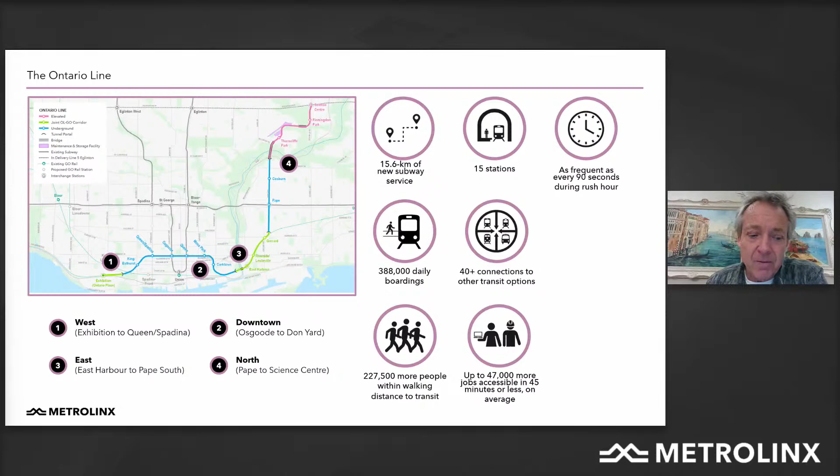So this is Gerrard Station. Gerrard is at the corner of Carlaw and Gerrard Streets. We're expecting during the peak morning hour to have 3,300 people passing through this station. And we have entrances on the northeast corner and the southwest corner of Gerrard and Carlaw.

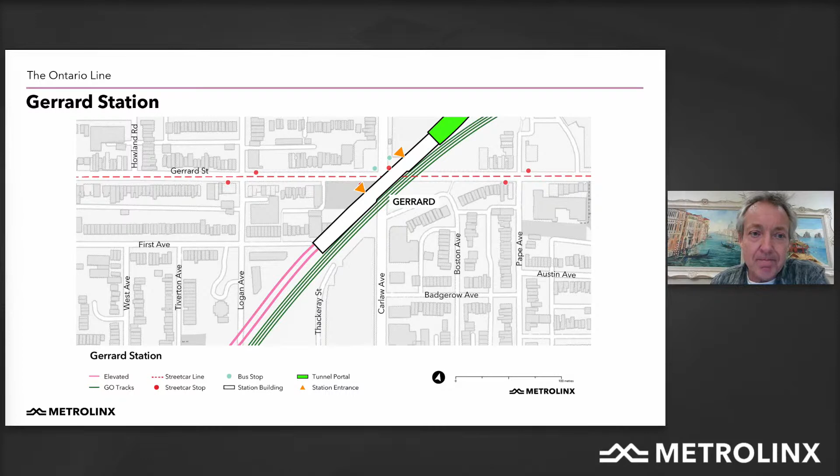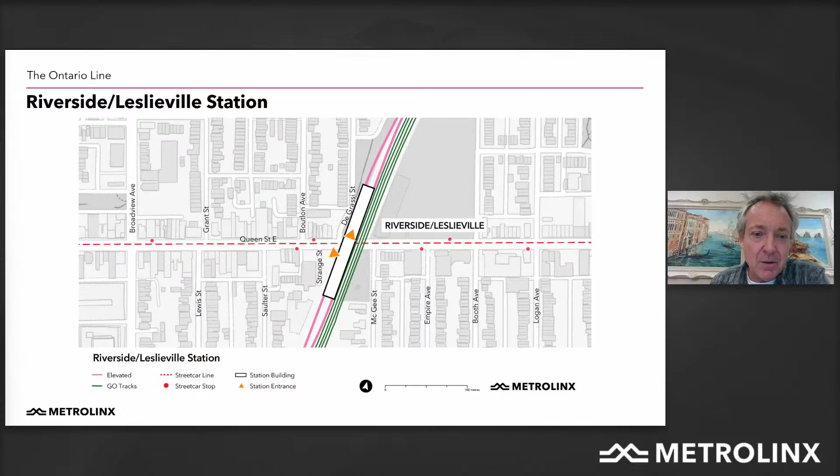Passing through the joint corridor area where we're running in the area with GO Transit, we come to Riverside Leslieville Station. Here, we're expecting to serve over 4,000 people during the peak morning hour, and we have entrances on both the north and south sides of Queen Street.

As we head south and over the Eastern Avenue Bridge, we come into East Harbour Station. East Harbour Station is where we have an interchange with GO Transit. Here in the AM peak period, we're expecting over 14,000 people per hour. As we go across the Don River, we come into the Don Yard area where we have a structure called a portal, and the portal is the entranceway to the underground section of the subway.

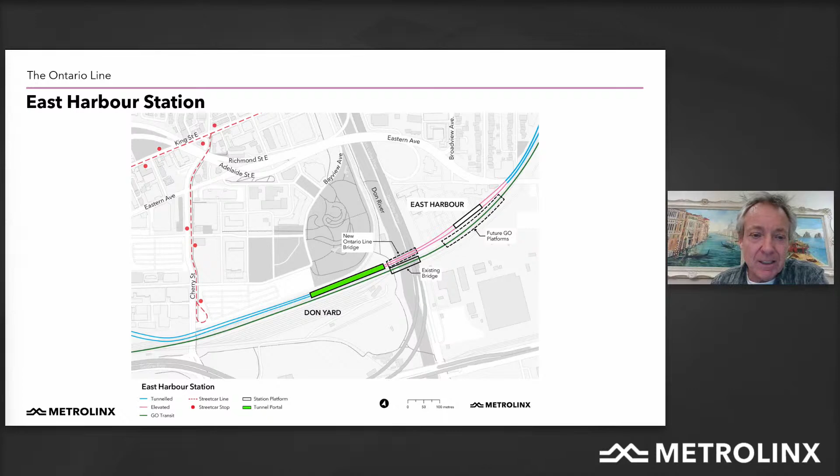As we continue heading west, and in this case north, we come to Corktown Station. It's at the corner of King and Berkeley Streets, with its entrance on the southeast corner. This station, we're expecting over 4,000 people per the AM peak period hour.

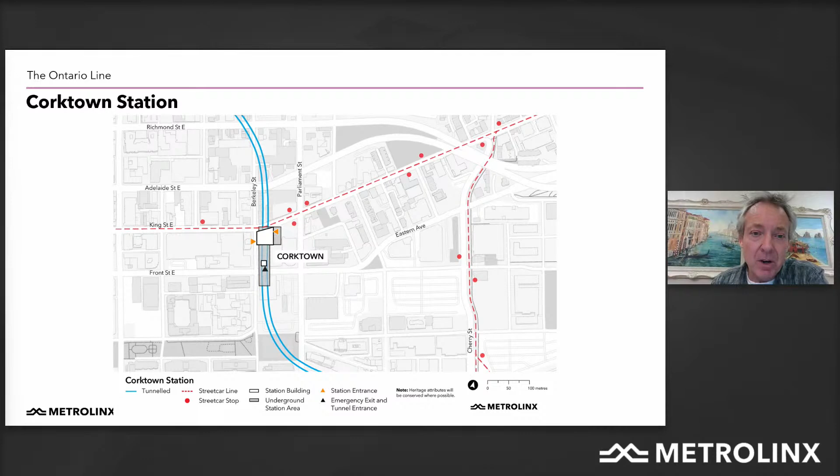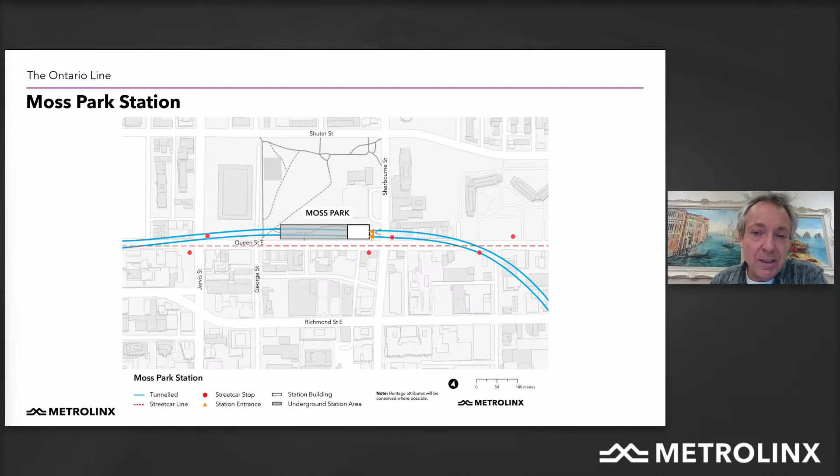Heading back up to Queen Street, we're at Moss Park Station at the corner of Queen and Sherbourne with over 7,300 passengers boarding and alighting during the AM peak period. The station entrance is on the northwest corner of Sherbourne and Queen.

Continuing west along Queen, we come to Queen and Yonge with the interchange station with Line 1. This is the busiest station for the Ontario Line with over 16,000 boardings during the AM peak period.

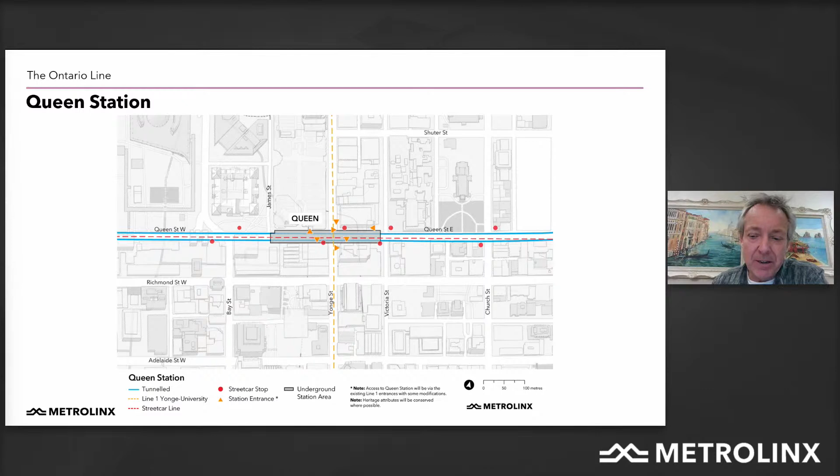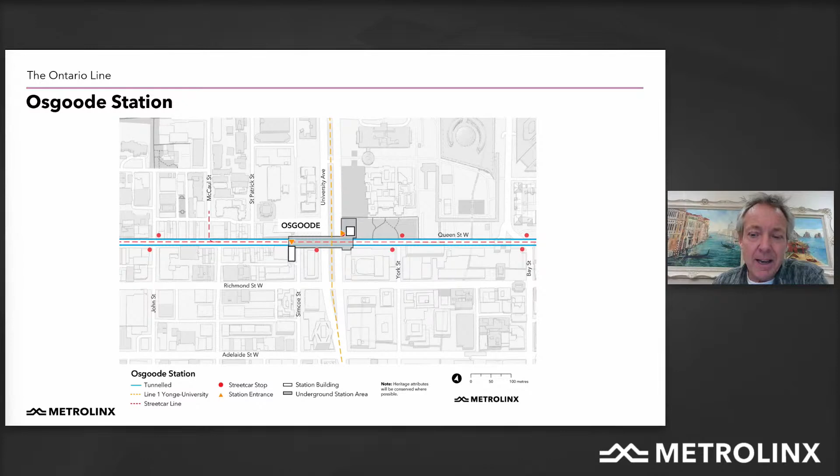As we continue west underneath Queen Street, we come to another interchange station with the existing Line 1 subway, Osgoode Station. Osgoode will have over 12,000 people passing through the station during the AM peak period.

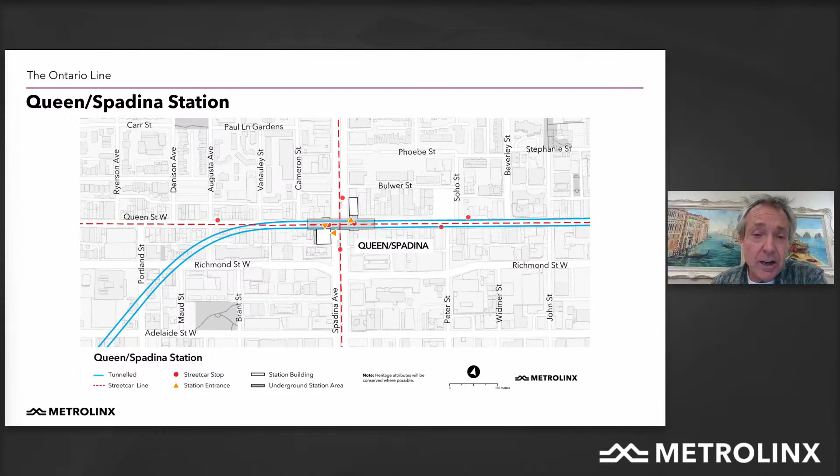Once again, heading west, we get to the corner of Queen and Spadina. At Queen and Spadina, we have over 7,000 riders coming through during the morning peak hour, and we have entrances on the southwest corner and northeast corner.

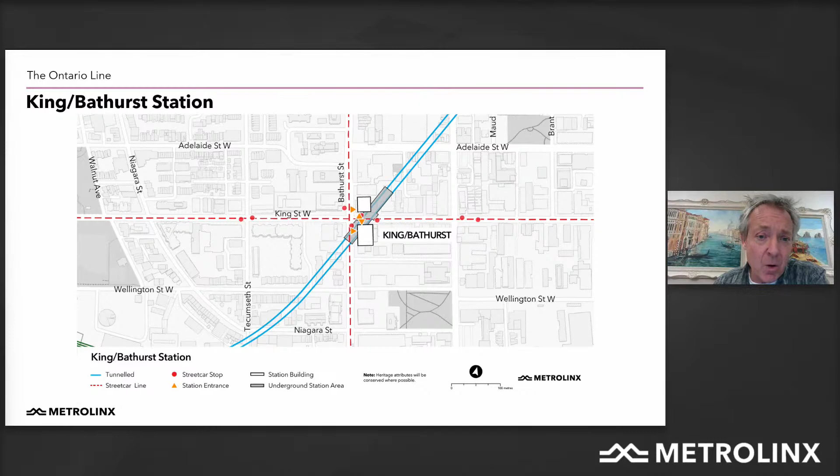As we head further west, we come to the King Bathurst Station, which is on the corners of King and Bathurst. Here we have entrances on the northeast corner of King and Bathurst and the southeast corner of King and Bathurst. We have over 5,000 people passing through this station during its AM peak hour.

We come to our terminal station at Exhibition. Here we have an interchange with GO Transit with over 12,000 people during the AM peak hour passing through this station. It also gives great access to Liberty Village.

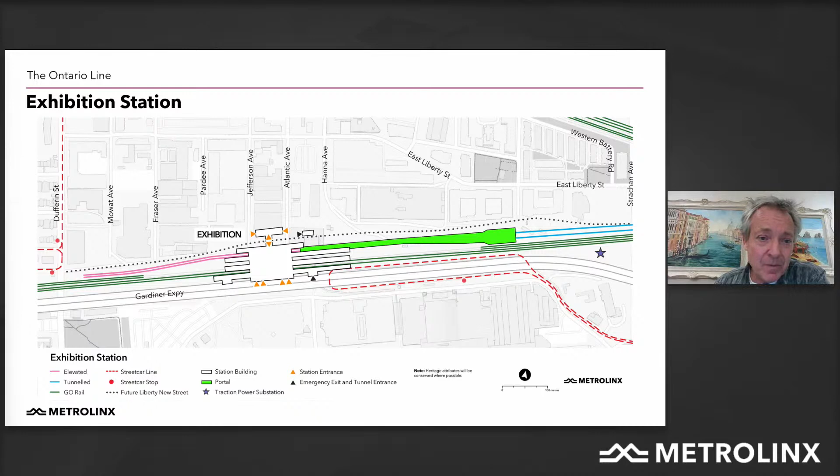So what are we expecting over the course of the next few years? Well, by mid-year 2022, we will have started construction for the Exhibition early works, the Corktown early works, and the Lower Don Bridge and Don Yard early works. In late 2022, we're going to start the downtown advanced works, the Joint Corridor early works, and the East Harbour early works. By 2023, the two big projects which are currently in market, the South Civil Stations and Tunnels contract will begin, as well as the Rolling Stock Systems Operation and Maintenance contract will begin. By late 2024, we will have tendered and awarded the North Civil Stations and Tunnels contract, and construction will begin there.

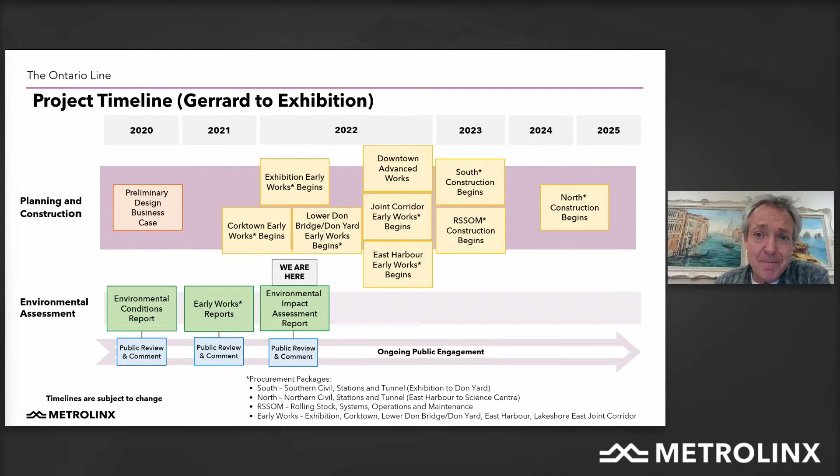Our environmental assessment work for the Ontario Line has been well underway for the past few years. For this work, we're following a project-specific environmental assessment regulation, which is similar to the transit project assessment process or the typical environmental assessment process for transit projects, in that it requires study of the existing environment, consultation with interested parties, and identification of mitigation to avoid or reduce impacts of the project on the existing environment.

One way that the Ontario Line environmental assessment process differs from the typical environmental assessment process for transit projects is that it's phased. So we completed the first phase of the environmental assessment looking at existing conditions back in 2020 when we published the environmental conditions report. This report collected baseline information about all the typical environmental disciplines that we look at in a transit environmental assessment,

like archaeology, cultural heritage, noise and vibration, the natural environment, socioeconomics, air quality, traffic, and soil and groundwater. The second phase of the Ontario Line environmental assessment process is early works reporting. And those early works reports build on the environmental conditions report with completion of standalone impact assessments for portions of the project that are proceeding to implementation ahead of main works. So we completed 5 early works reports through the end of last year for works at Exhibition Station, Corktown Station, the Lower Don Bridge and Don Yard, at East Harbour Station, and for the Lakeshore East Joint Corridor. And each of these reports has now been approved by the Minister of Environment, Conservation, and Parks.

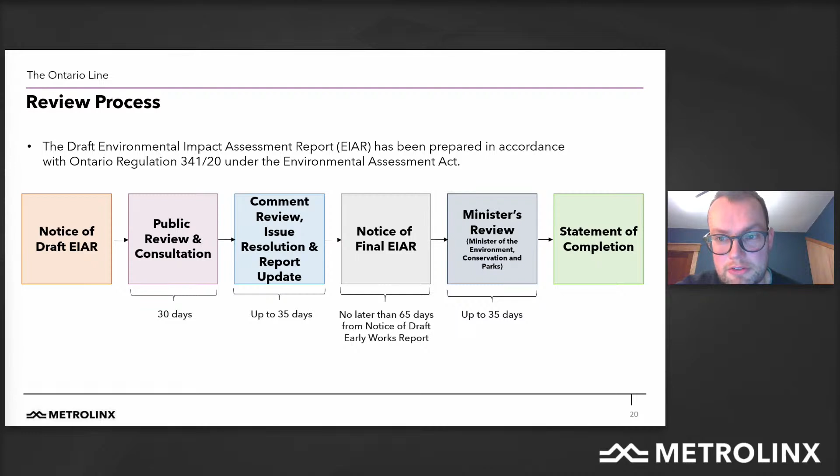The environmental impact assessment report is quite extensive. It's several thousand pages in length, and the full report with all of its appendices is available on our website, along with environmental topic-specific summary pages that we've crafted to help facilitate review. So for tonight's virtual open house, we wanted to provide an overview of the key findings and commitments for each of the environmental topics.

I'd like to start with construction noise and vibration management, which is one of the topics we hear the most interest in, and share how Metrolinx takes a proactive approach to comprehensively managing noise and vibration from our construction activities.

We model construction noise and vibration in the environmental impact assessment report, and we use conservative assumptions because of the current phase of planning and design that we're at. These conservative assumptions include simultaneous use of construction equipment at full power throughout the entire project footprint. Our assessment, based on these conservative assumptions, does show that construction activities will require mitigation, like phasing or coordinating the timing of specific construction activities, implementing site hoarding that's effective as a noise barrier, and using equipment on lower power settings at certain times of day.

The assessment that we include in the environmental impact assessment report is only the first phase of our work in this area. And we spell out and commit to our next steps for managing construction noise and vibration in the environmental impact assessment report.

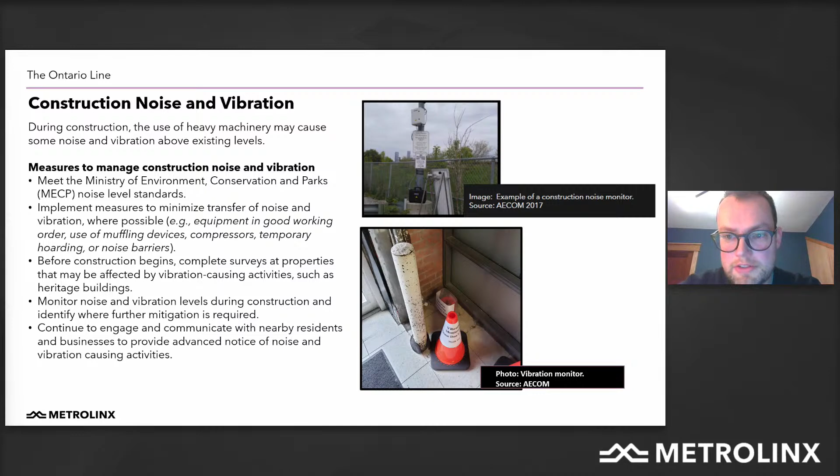We also model noise and vibration from Ontario line operations in the environmental impact assessment report, to identify where mitigation is needed and which type of mitigation solutions will be most effective.

For the tunnel portions of the project, vibration isolation to separate the tracks over which the subway trains will travel from the tunnel will be needed, to keep noise and vibration below perceptible levels. In some locations, special lower stiffness fasteners, which connect the rails to track slab, are recommended to isolate vibration. In other locations, we recommend a rubber or spring system under the track slab, but above the bottom of the tunnel, to isolate vibration.

Each of the solutions we're prescribing will effectively limit transfer of vibration from the moving trains to the tunnel, which in turn limits any vibration that could travel through the ground to nearby buildings, and then either be felt as vibration or as noise generated by vibrations moving through a structure. With the mitigation we'll be implementing as part of the project, both noise and vibration from Ontario line operations through the tunnels will be below perceptible levels. The assessment in our EIAR demonstrates that this is readily achievable.

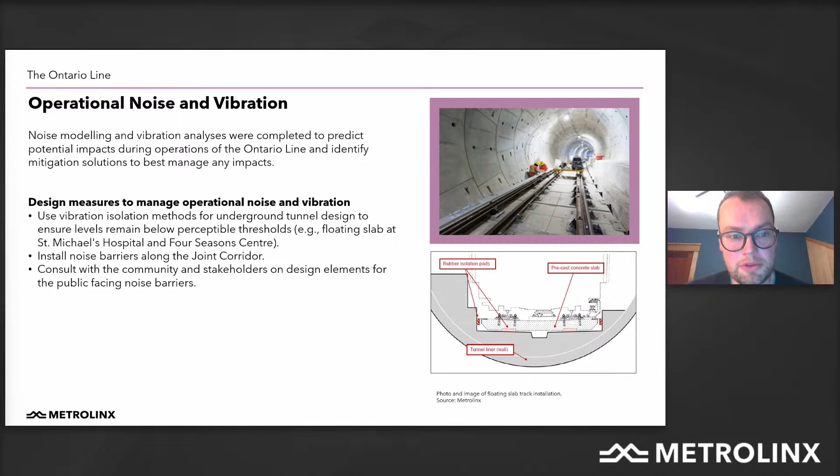Metrolinx is committed to ongoing engagement on the design of these noise walls, to make sure their look and feel integrates well with the surrounding neighborhood as planning and design progress.

The immersive sound demonstration, I think, is a really neat tool. It allows for experiencing future noise levels and makes the decibel numbers we present in our reports come to life. I'd very much encourage checking out the tool if you're at all interested in experiencing what future noise levels near the joint corridor will sound like.

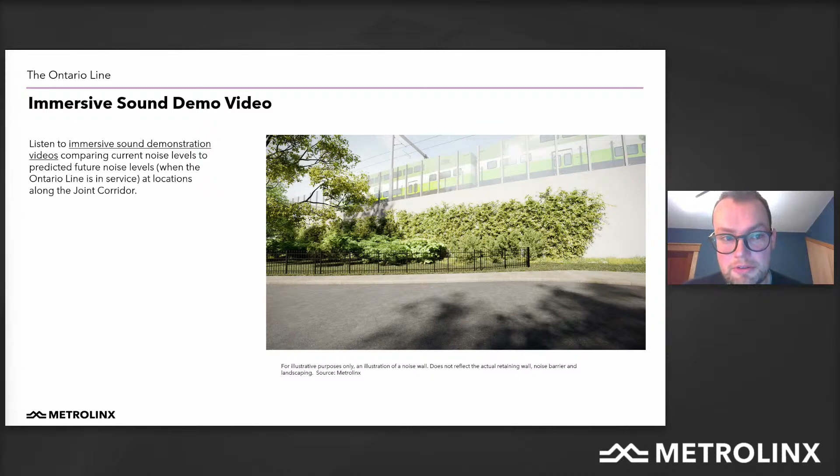Getting into cultural heritage, we are very aware of the important cultural heritage resources along the route of the Ontario line, and we're working to avoid impacts to these properties wherever we can, while accommodating the best transit solution.

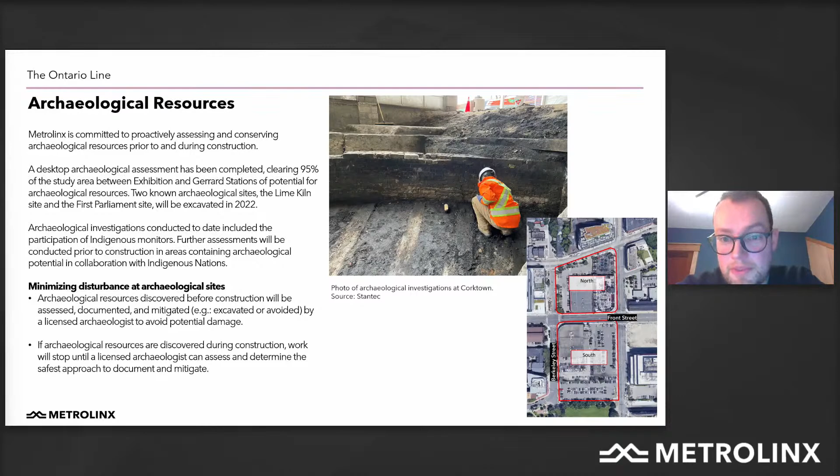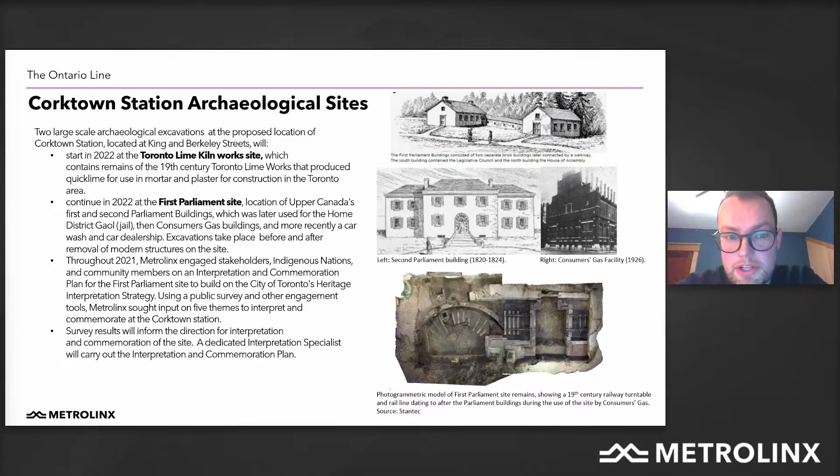And with that, I'd like to turn it over to Jesse now to take us through the findings of the remaining environmental topics that we assessed in the EIAR.

Thanks, James. The Environmental Impact Assessment Report evaluates impacts to traffic from construction and operation of the project. The Transportation and Traffic Report, appended to the main EIAR, looked at potential impacts and subsequent mitigation measures for pedestrians, cyclists, public transit, and automobiles, including possible impacts on downtown parking.

For example, to mitigate impacts from the Queen Yonge Road closure to facilitate construction of Queen Station, we commit to permanent enhancement of the streetcar network in the area in collaboration with the TTC.

Additional committed mitigation measures during construction include maintaining northbound traffic flow on University Avenue using traffic controls, maintaining access to the many businesses and their loading docks in the area, as well as providing safe temporary detour routes for pedestrians and cyclists where required.

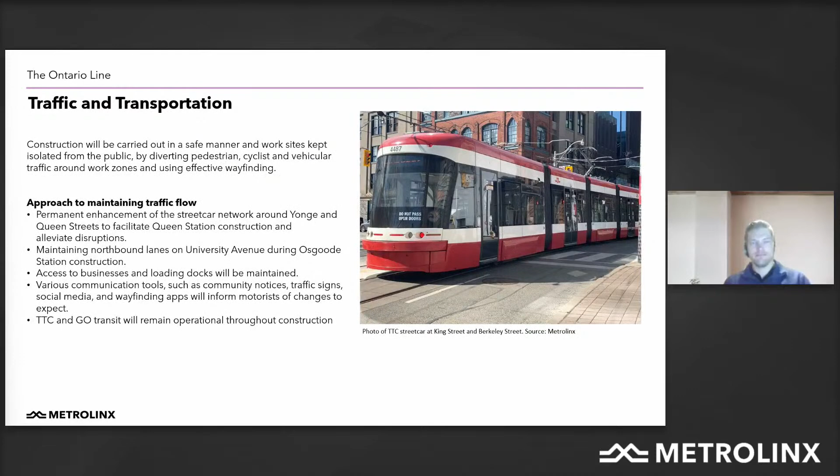As part of the EIAR, we also looked at potential socioeconomic impacts. This involved identifying and assessing socioeconomic features and land use characteristics, including existing land use patterns, public transportation networks, public realm features, community amenities, neighborhood demographics, and future development.

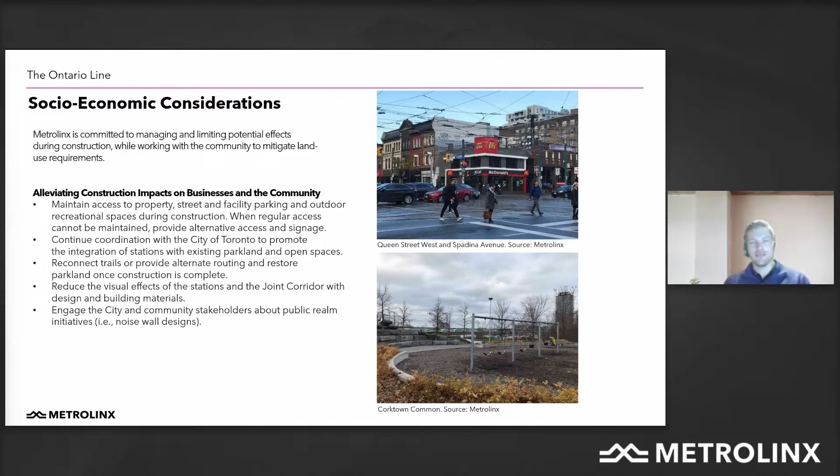In terms of mitigation, we commit to maintaining access to property, businesses, and recreational spaces throughout construction while avoiding disruptions as much as possible. We also commit to continued engagement with the City of Toronto and local communities on public realm, like the look and feel of future stations as design progresses.

For natural environment, we assess natural components like vegetation communities, fish and wildlife, habitat, and species at risk. Our subject matter experts first reviewed existing information from the Environmental Conditions Report from agencies like TRCA, Toronto Region Conservation Authority, and the Department of Fisheries and Oceans Canada.

We supplemented this information by completing field surveys of plant communities and wildlife habitat. Our team then overlaid project designs within the study area to identify potential effects.

We recognize that green space and parklands are limited resources in the city, and with this in mind, we are working to refine designs to minimize tree removals and protect trees wherever we can. That being said, the project will need to remove some trees in order to accommodate safe work zones during construction and to allow for new infrastructure.

Where tree removals are required, we will take a surgical approach, protecting surrounding trees with barriers and performing removals outside of sensitive timing windows for wildlife as much as possible.

We will compensate for all removals in accordance with city permitting requirements and by following the Metrolinx vegetation guideline, ensuring a higher degree of compensation for parks and natural areas and planting many more trees than we remove.

We are also working with the City of Toronto and TRCA to identify local compensation opportunities and tree planting locations to help offset any required removals and contribute to ecosystem revitalization within the project area.

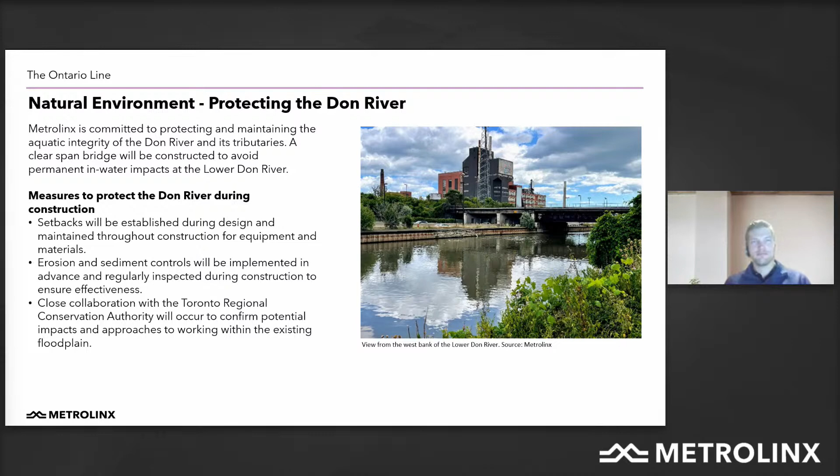Existing soil and groundwater conditions were assessed using available information to identify potential effects, mitigation measures, and monitoring activities during construction and operations. Further geotechnical and due diligence investigations ahead of construction will confirm existing conditions and inform project design to ensure potential impacts of soil and groundwater are either avoided or mitigated.

We commit to proper handling and management of soil and groundwater during construction in accordance with all regulatory requirements and approvals. This includes the new excess soil regulation, as well as requirements pertaining to contaminated soils and dewatering. Once construction is complete, we do not anticipate any long-term effects during operations of the Ontario Line.

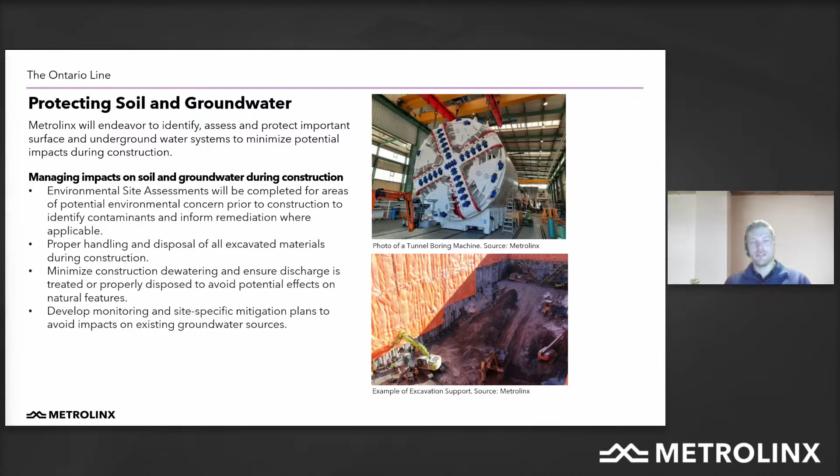We assess potential impacts to air quality for both construction and operations as part of the Environmental Impact Assessment Report. The Ontario Line features electric trains that will improve local air quality by reducing direct emissions and taking cars off the road. Potential impacts during construction will be avoided through active monitoring and mitigation, including the use of dust suppressants, covering of stockpiles, using wind screening, and the implementation of proper excess materials handling and equipment washing procedures.

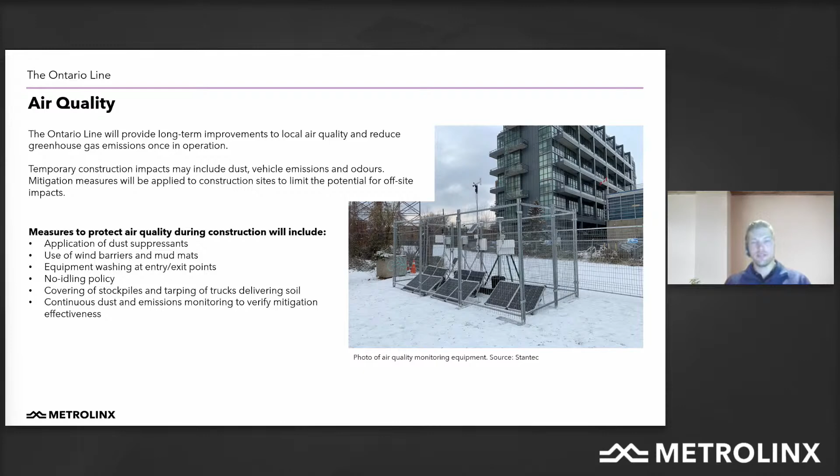As many of you are already aware, the draft EIAR is now posted on our website for review and input until March 9th, after which public inputs will be reviewed and addressed for publication of the final Environmental Impact Assessment Report in April 2022. And with that, I will now hand the mic over to Vicky, who will provide further details on our property requirements for the project.